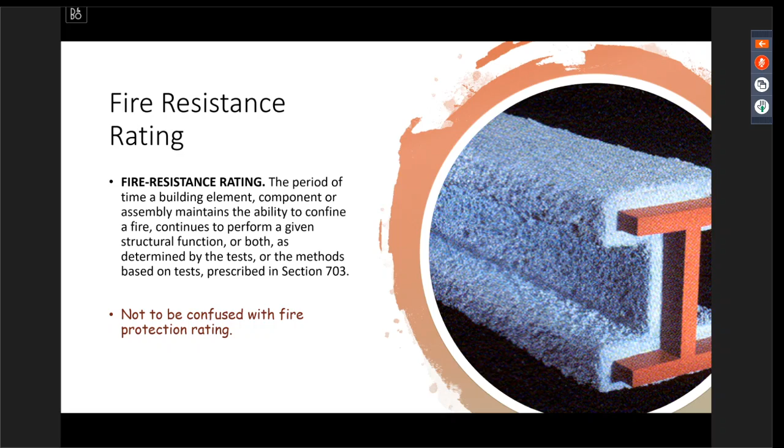So I'll get to that in a minute. So at the beginning of this, the period of time a building element... What is a building element? The building element is a fundamental component of a building construction listed in Table 601.

What are those? So in 601, your building elements: your primary structural frame, your bearing interior walls, your bearing exterior walls, non-bearing walls and partitions, both interior and exterior, and then floor construction and associated secondary members, and roof construction and associated secondary members. So we're talking about fire resistance rating.

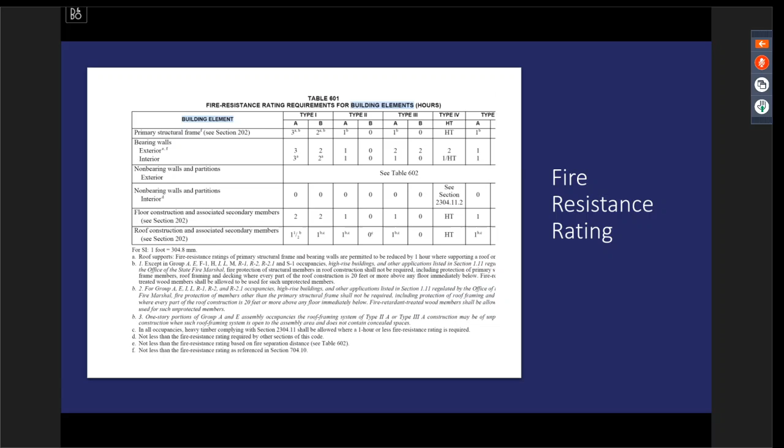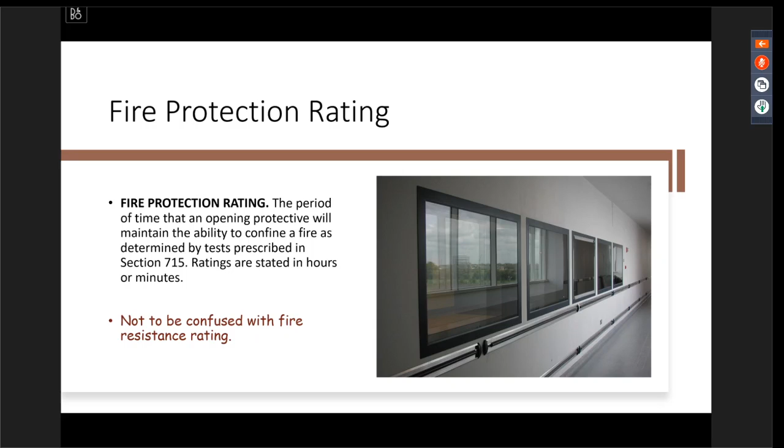These are the elements we're talking about, as opposed to fire protection rating, which is defined as the period of time that an opening protective will maintain the ability to confine a fire as determined by test prescribed in 715. So two different things. So today we're talking about the fire resistance ratings.

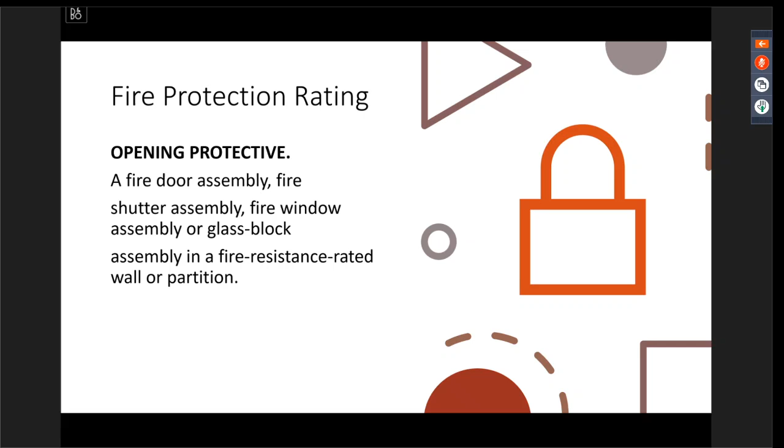And then the opening protectives include fire door assemblies, fire shutter assemblies, fire window assemblies, or glass block assemblies in fire resistance rated walls or partitions. So opening protectives are just as it sounds, the protection of the openings within those fire resistance rated assemblies.

So one of the reasons I want to talk about this today is it's kind of a starting point for a lot of what we do. So, as I mentioned, these different webinars can branch off into openings, doors, all the requirements for doors, vertical joints, all kinds of things. But starting at the very, very basic, we often get plans that the wall legend looks like this, or something similar. This is just an example.

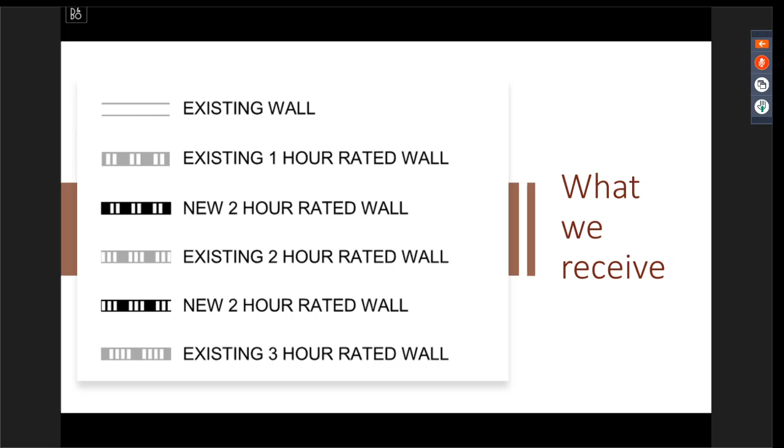So you have an existing 1 hour wall, a new 2 hour wall, an existing 2 hour wall. This doesn't really help the plan reviewer, or, these are construction documents, right? So it doesn't help the individuals out on the site constructing to the plan. Because what type of wall? You can have a 1 hour fire barrier, 1 hour smoke barrier, a 2 hour fire barrier. So the rating, yes, we need the rating identified, but also the wall type.

What type of wall is it? You have firewalls, fire barriers, smoke barriers, partitions, fire partitions, smoke partitions. So I put this out there, and some may think, well, that's pretty basic, but we see it time and time again on the plans, and then it does cause issues.

We had a project recently where the designer had the wall identified as 1 hour wall. It went through plan review, 1 hour wall, got out into the field, built as a 1 hour wall. But what type of 1 hour wall? So the FDD got out there, the field individuals got out there, looked at the room. So this room needs a 1 hour fire barrier. This wall is constructed as a 1 hour fire partition. What was the difference? How the openings were protected.

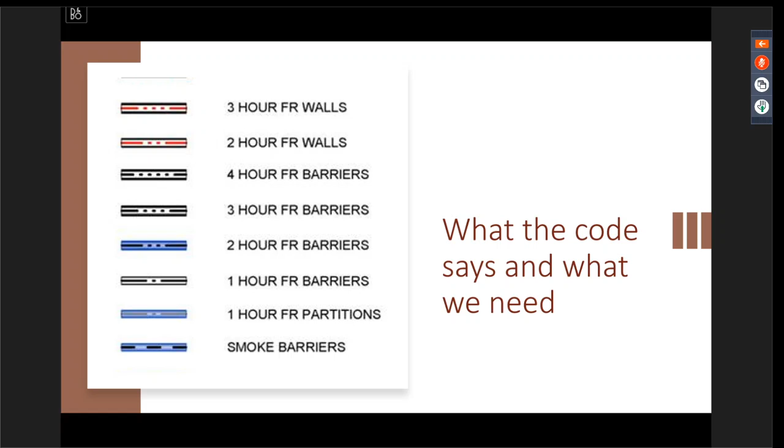So a lot of work had to happen at the end of the project that could have been avoided through the beginning. So I'm bringing that up as one. Just identify the walls, how the code defines them, but also how the code names them. What are their names? You have firewalls. The firewalls are constructed a bit differently than fire barriers.

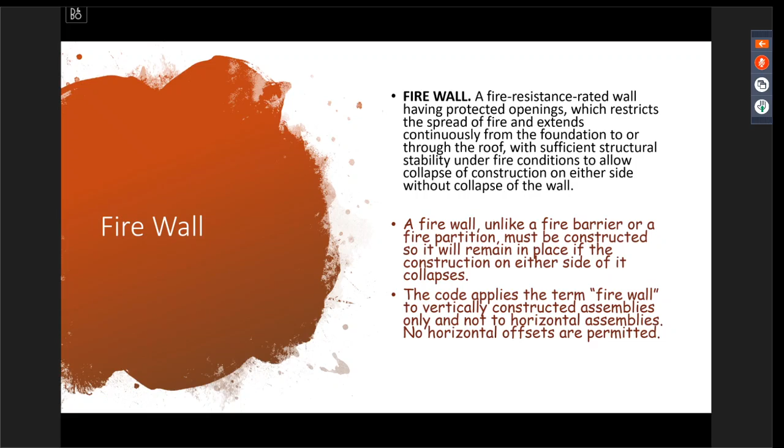So unlike a fire barrier or fire partition, the firewall must be constructed so it will remain in place if construction on either side of it collapses. So if the structure on one side of the firewall collapses, that wall stands, and vice versa. So that's much different than how a fire barrier would have to be constructed. So you can see that's a big difference construction-wise. These are different types. Obviously, firewall is a type of firewall, but also party walls are a type of firewall.

There's always a general section in the code, whatever we're talking about. But right now we're talking about the general section for the walls. The firewall should be constructed in accordance with 706.2 through 706.11. And the firewall provides a complete separation.

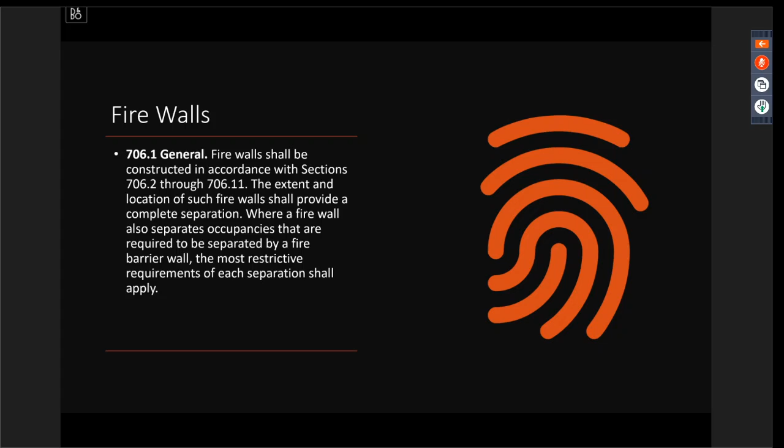And then it talks about where the firewall also separates occupancies, which would be a fire barrier. So in this case, the wall would be a firewall and a fire barrier. Then the most restrictive requirements of both types of walls would apply. And that's the case with any of them. If you've got a smoke barrier, fire partition, fire barrier, requirements for both types of walls apply when those walls often intersect.

So firewalls, when are they required? You kind of have to play Where's Waldo with this part of the code. Where are these required? You find it by looking at different sections and knowing when they're applicable. So generally three situations: when they're separating two different types of construction, and also to allow for area and height increases above what the code minimum is in Chapter 5. And then when you have two adjacent walls of buildings that share a lot line.

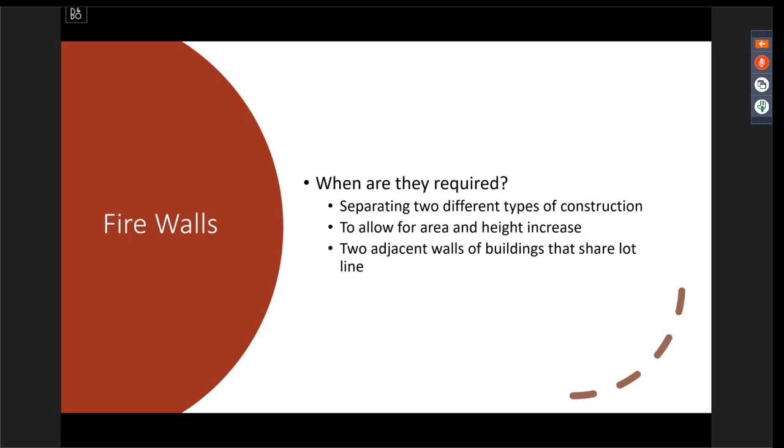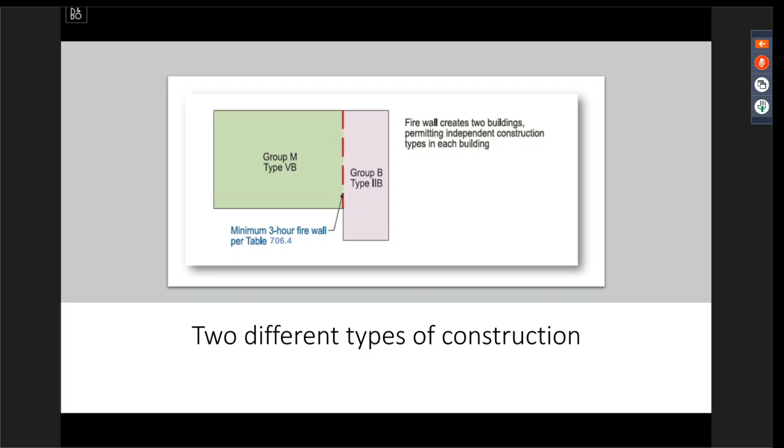Here are some visuals for those. In this example, you'll see two different types of construction: a Group M 5B construction type adjacent to a Group B 2B construction type. Two different construction types, so a firewall would be required. You would look at Table 706.4 to see what hour rating that firewall would need to be.

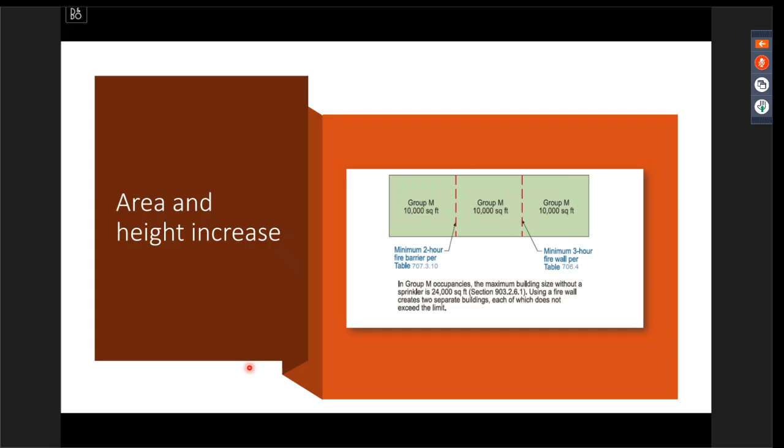Let me see if I can get my laser pointer here. This is calling out for a 2 hour fire barrier, and here's where the firewall is. Putting this firewall in place brings the area back down to what is code compliant. This fire barrier is just there to indicate that that's needed for fire area separation.

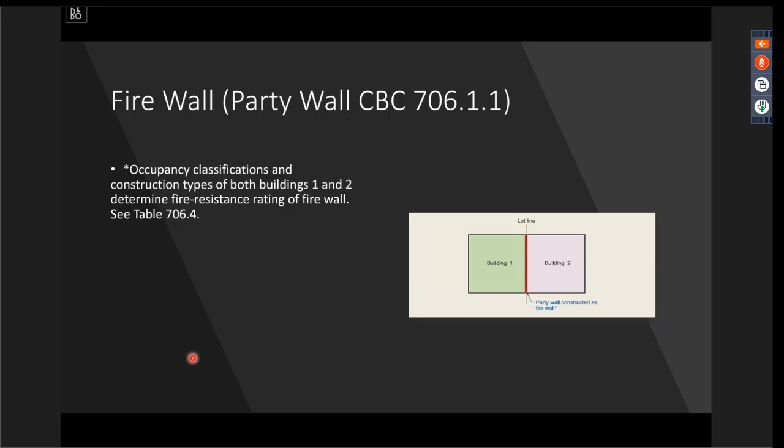This example is for the occupancy, the party wall example, where you've got two different buildings with the lot line smack dab in the middle. The firewall would be here to separate those two different buildings on these different lot lines.

The next type of wall is a fire barrier wall: a fire resistance rated wall assembly of materials designed to restrict the spread of fire, in which continuity is maintained. As you read through the general sections at the beginning of each wall type in Chapter 7, you'll see similar language, which is also why it gets confusing. This says the same thing as the section for fire partition as far as what materials it has to be built out of. It's where the walls are required that will determine what type of wall you need. Make sure you're looking at the right type of wall for what you need.

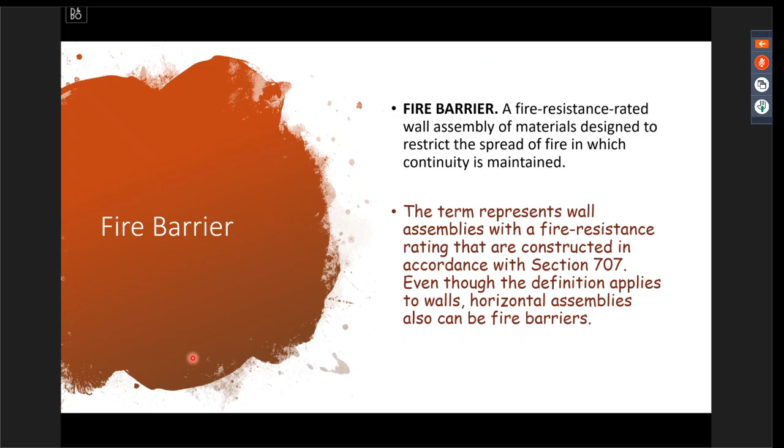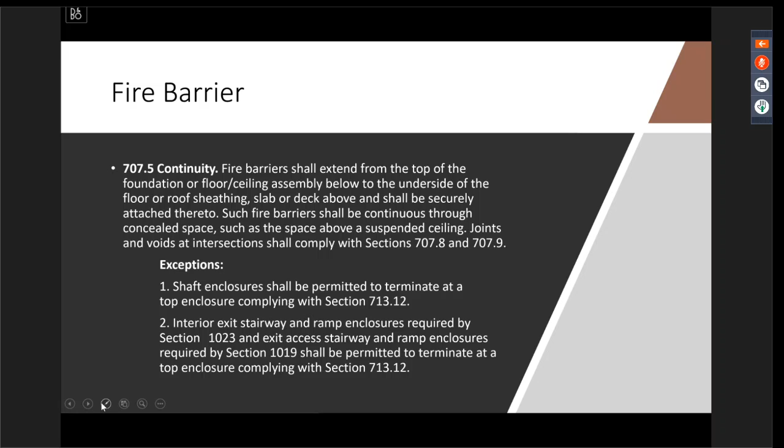Fire barriers are found in 707. Even though that section is talking about the fire barrier wall, horizontal assemblies can also be fire barriers - it's just not a fire barrier wall. In each of the sections there are requirements for continuity. 707.5 is the section for fire barriers, basically extending from the top of the foundation, floor, or ceiling assembly below, to the underside of the floor, roof sheathing, slab, or deck above. So that wall goes all the way through concealed spaces, through suspended ceilings - slab to slab. Here's a simple visual for that.

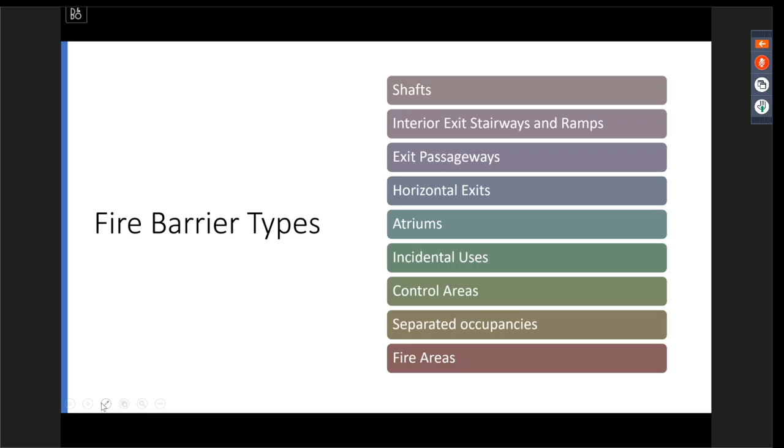So, types of fire barrier walls - just some examples of times you'll see fire barriers: shaft wall construction, the interior exit stairway and ramps, exit passageways, horizontal exits, atriums, incidental uses, control areas, separated occupancies, and fire areas. As you can see, there are many different types of fire barrier walls.

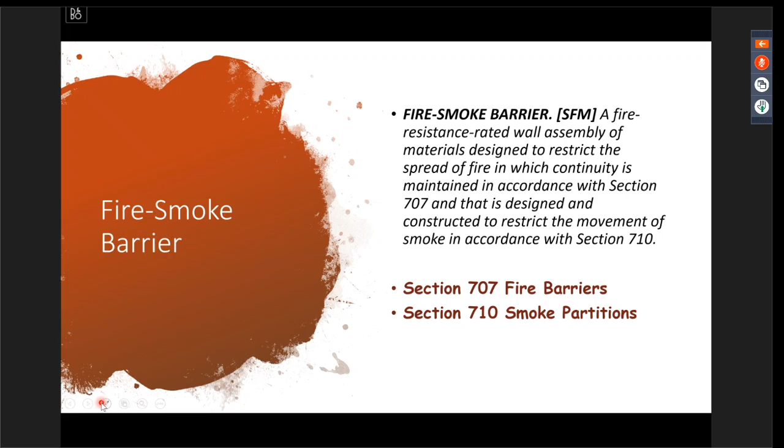Then there are fire smoke barrier walls - a fire resistance rated wall assembly of materials designed to restrict the spread of fire, in which continuity is maintained in accordance with 707, and that is designed and constructed to resist the movement of smoke in accordance with 710. So it's a dual purpose wall - fire barrier and smoke barrier. You'll find the requirements for fire barriers in 707 and for smoke partitions in 710.

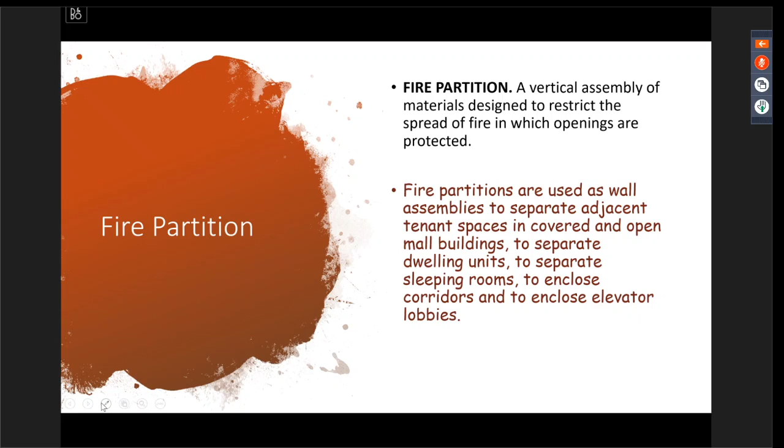The fire partition is another type of wall. We usually see these as corridors, 1 hour corridor walls, though there are other areas and occupancies where they're used - tenant spaces, malls, dwelling units, enclosing elevator lobbies. You'll see them in those areas too, but what we usually mean when we say fire partition walls are the corridors.

Again, continuity. Each of the walls is going to have a section about continuity. It doesn't make sense to have a fire rated wall or smoke wall when there are gaps in between, wall to floor, wall to curtain wall in the joint. So there are requirements to keep these continuous and to protect those connections where they occur at joints and curtain walls.

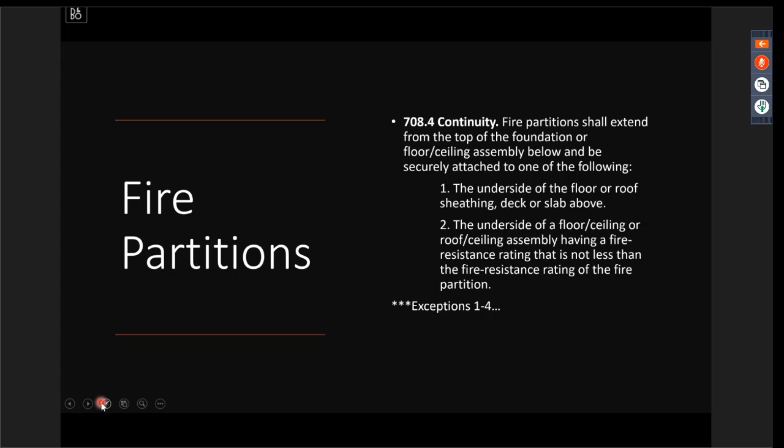This is section 708.4. Again, it's about continuity, but it's also the section that tells the 4 ways to build a corridor. I don't have the whole section here, exceptions 1 through 4 aren't listed. But if you're curious about the language of how to build the corridor, as opposed to just saying tunnel construction, which is common, look at this section. You'll read it, it'll confuse you. You'll need the pictures, they work better. We've got lots of those. So that's the section if you're curious.

Another type of assembly: horizontal assemblies, those are the floor and roof assemblies. A horizontal assembly is a component for completing the compartmentation. Horizontal assemblies have all openings and penetrations protected, and the protection is equal to that of the hourly rating of the floor or roof assembly. So you've got your cube, with the walls and the floor and ceiling that make up the compartment.

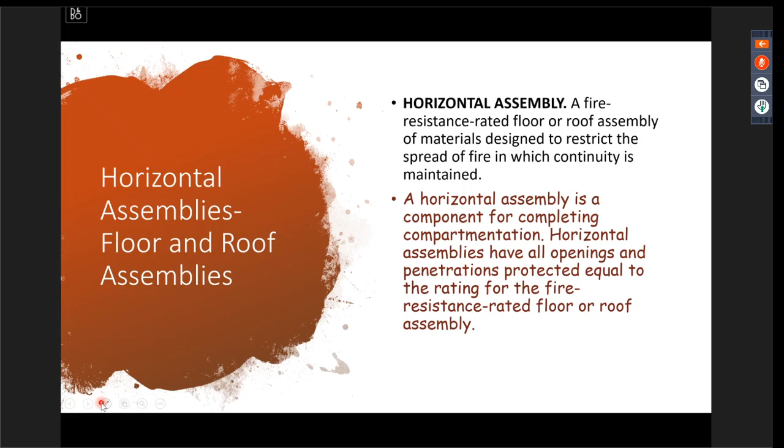Just an example, one simple example of a floor ceiling assembly. These pieces together, here and here, make the assembly. This by itself is not a rated assembly, and this by itself is not a rated assembly. The 2 portions together make the rated floor ceiling assembly.

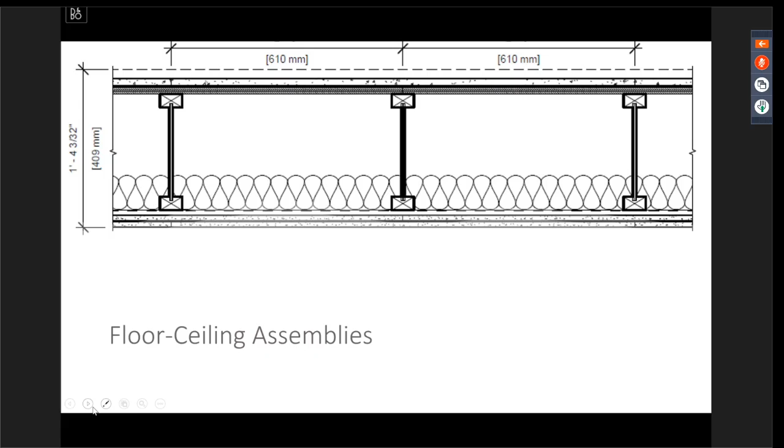As a side note, watch when you see insulation installed at the top, attached to this top layer of the ceiling membrane portion of the assembly. There's a section in 7 that indicates if the application will affect the way the temperature exchange happens, the heat exchange, it has to be listed and tested that way. So what I mean is, I apologize, I forgot the exact section, but if the insulation is attached here, the assembly has to be tested and listed with the attachment here. Otherwise it'll be attached up here. So if you've got fire down here, this can affect how that heat exchange happens. Anyways, we don't want to get into the weeds with this. We can save that for the long presentation.

Smoke barriers, of course, are a continuous membrane, and they're either vertical or horizontal and can be walls or floors or ceiling assemblies, designed to restrict the movement of smoke.

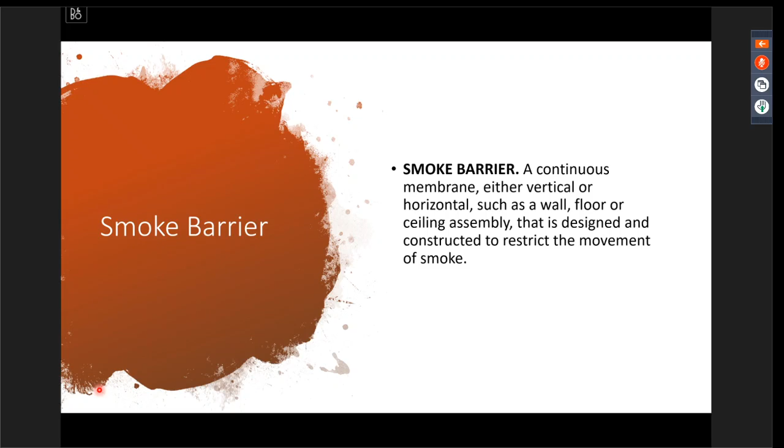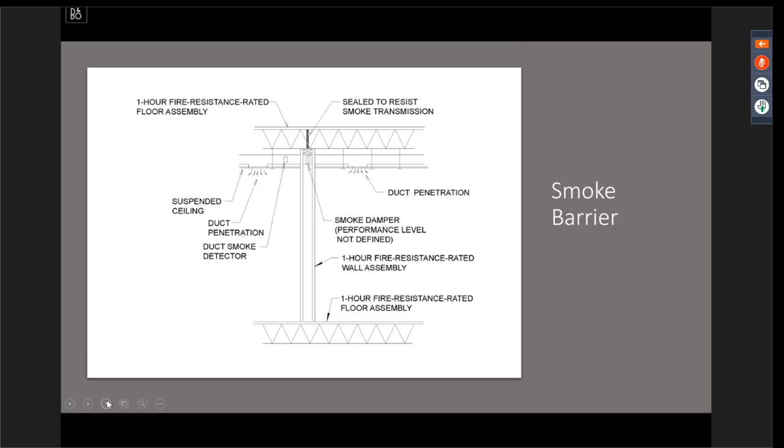Another visual, and of course with your smoke barriers and your rated walls, you've got dampers, your floor ceiling assembly or floor assembly, and your roof ceiling assembly or floor ceiling assembly, continuous all the way through, dampers where needed. A smoke compartment is a space within a building enclosed by smoke barriers on all sides, including the top and bottom.

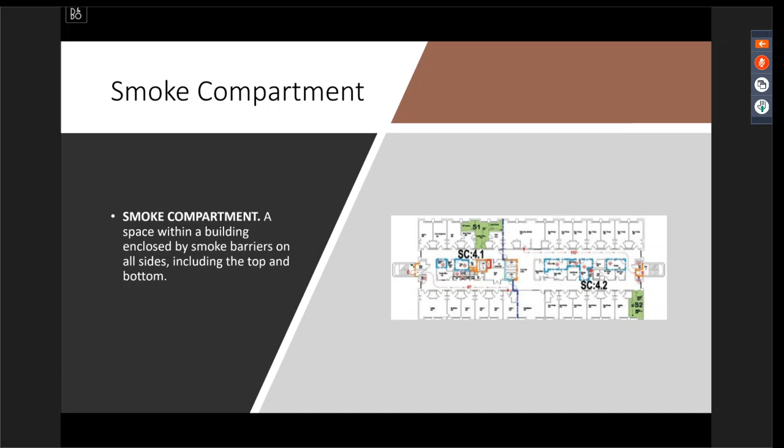And for our occupancies, that smoke barrier is also going to be a fire barrier. But remember, it's a cube, not just the walls, but also the ceiling and floor ceiling assembly above and below. Which I bring up because of L ratings. Sometimes it's forgotten that the floor ceiling assemblies and roof ceiling assemblies would also need an L rating. The joint assemblies need an L rating too because it also makes up part of this smoke compartment, smoke barrier. This is just a visual.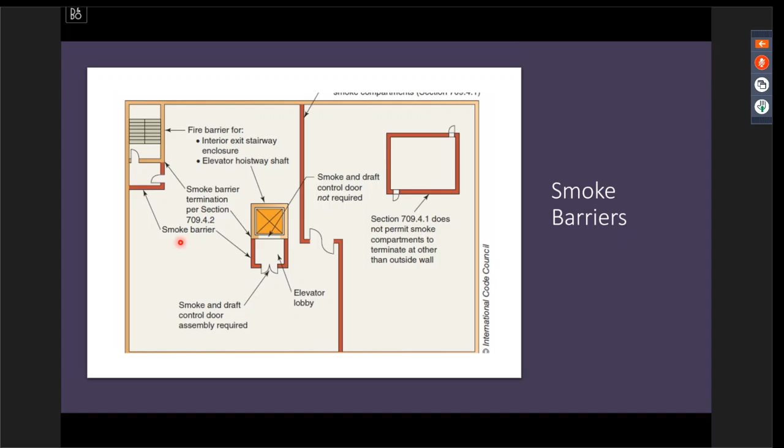They're used for the lobby and the area of refuge. Smoke partition is another type.

We don't see these too much by themselves in I-2s in California. In other parts of the country, you will see smoke partitions all over the place, including their corridors, but not in California. We have 1-hour fire partitions, but a smoke partition is a wall assembly that extends from the top of the foundation or floor below to the underside of the floor, roof sheathing, deck, or slab above.

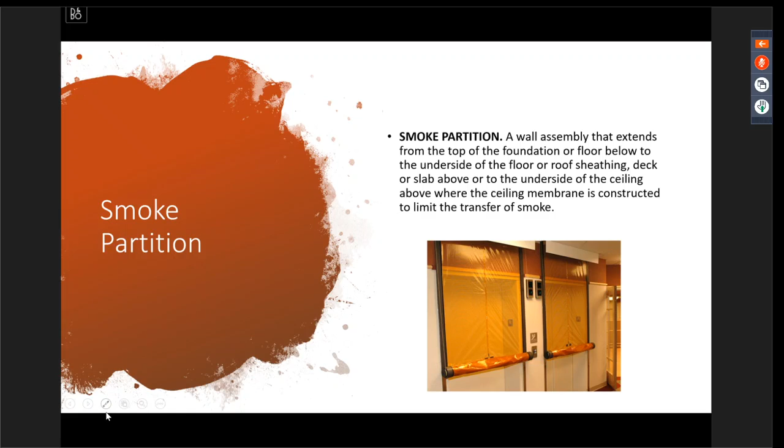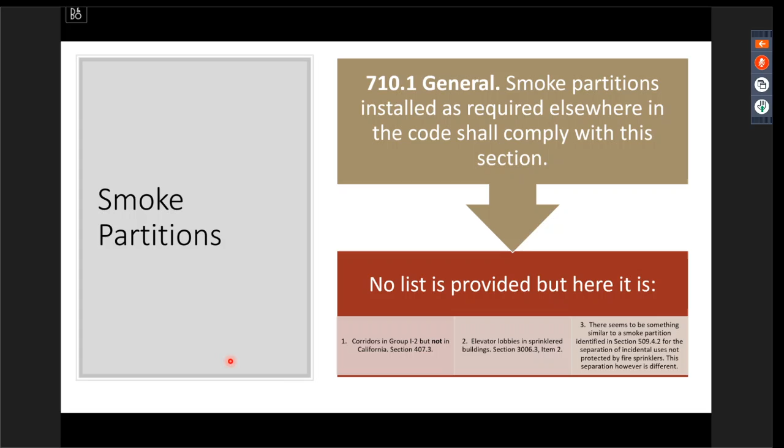Smoke partitions are kind of vague, the general section will say smoke partitions installed as required elsewhere in the code shall comply with this section. So elsewhere, again, another where's Waldo, where is this information saying we need them? Again, in I-2s in other parts of the country, they can use smoke partitions, not in California. Elevator lobbies in sprinklered buildings could have smoke partitions. And then another one, number 3, incidental uses. I don't want to focus on that either because that's also not in California. But you do see them, you just don't see them often.

So what are not all the other issues, but what are many other issues or topics that come into play when we're talking about fire resistant rated assemblies, which is why this 10-minute overview is brief, but we could go hours into this: vertical openings, penetrations, fire stopping, fire resistant joint systems, the opening protectives. You could have 2 days worth of presentations for doors, windows, glazing, rating, the size allowances, when do you need tempered glass, what opening can be in what type of wall, how big can it be, and then how do the doors work? Those are a bunch of other presentations all in one.

And then of course, ducts and dampers, where they're required, where there are exceptions, where you don't need the dampers. Concealed spaces, a section that is sometimes forgotten about when it's not a 5A. FT and L ratings, continuity, of course, and then the supporting structure. Whatever the wall or the assembly is rated, anything supporting it has to have that same rating. That comes into play, and then many more.

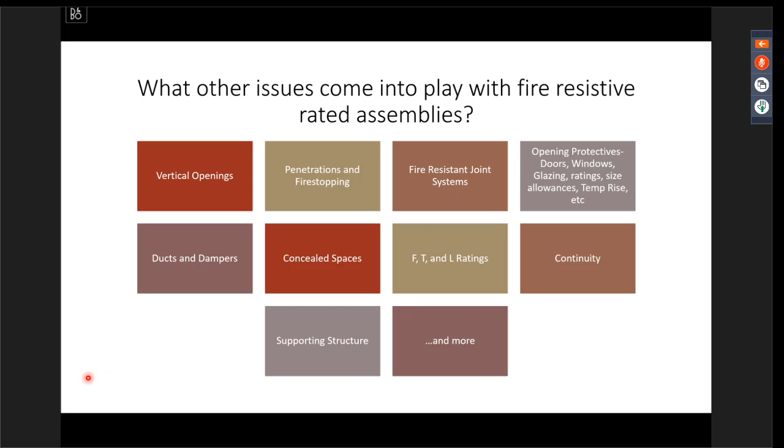So again, just a brief overview of fire resistance rated assemblies, and that is the end of that.